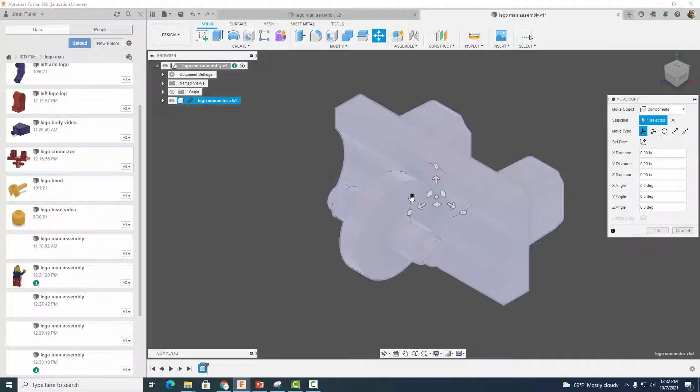The next thing I want to do is insert my Lego connector piece. I'm going to right click, insert into current design, and arrange it so it looks something like this. I'm going to select OK, then right click over here and select ground so it's held in place.

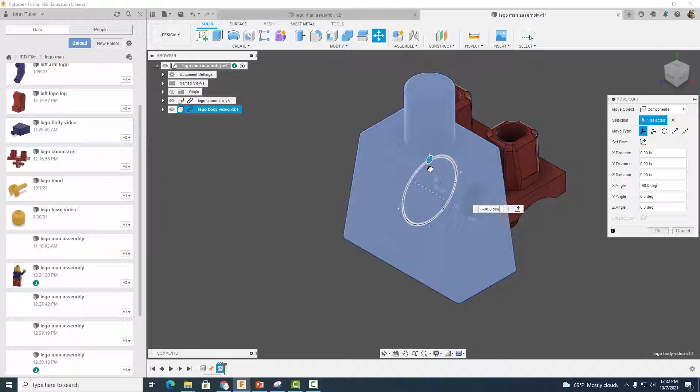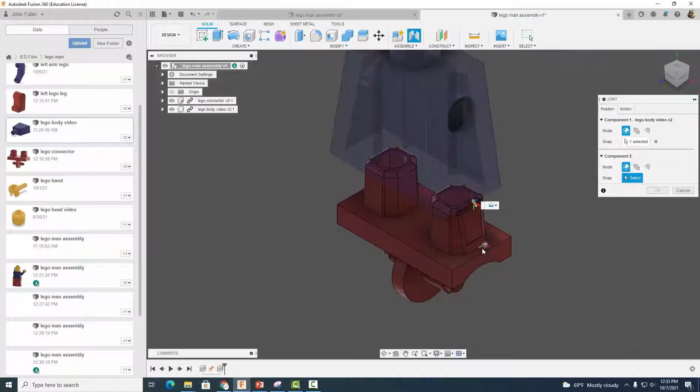The next thing I'm going to do is right click my Lego Man body, insert into current design, and move it up into place like this. Once I've got it positioned, I'll select OK, then add a rigid constraint. When I select joint, I'll choose rigid, select this midpoint, and make sure it matches up with this midpoint. That looks pretty good, so I'll select OK.

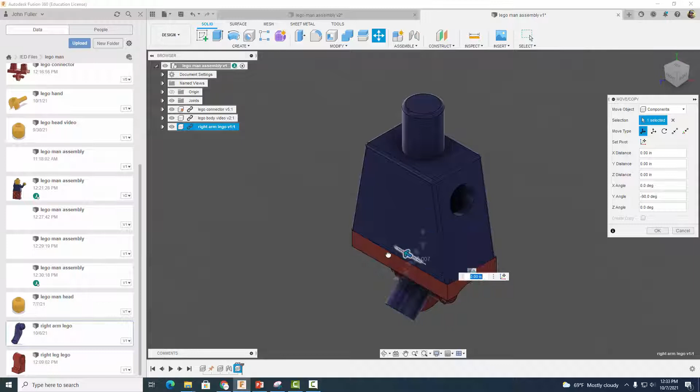All right, so we've got two parts already assembled. Now let's do the arms, starting with the right arm. Let's insert that into the current design. Once again, I'm going to rotate it around so it's in place where I want it, looking like it's ready to be assembled. Select OK.

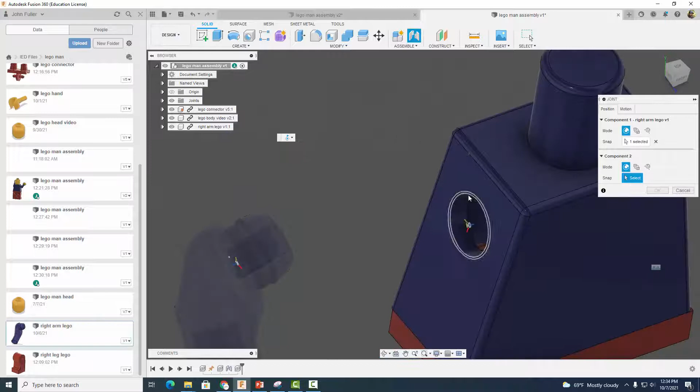Now we're going to go to assemble, select joint, and this time we're going to do a revolute joint. We want to select this surface so it matches up with that surface. That's what we want, so go ahead and select OK.

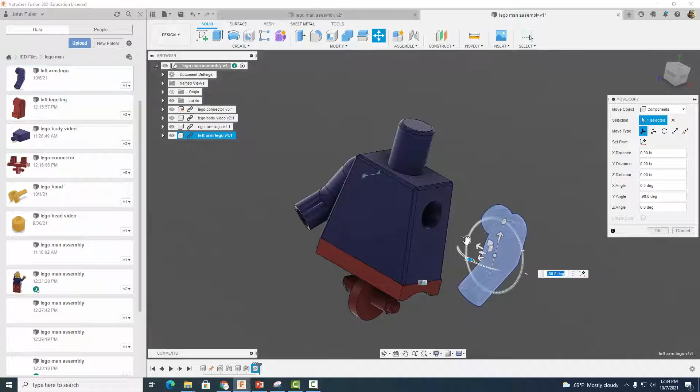Let's repeat this process now for the left arm. We're going to come on up, find the left arm, insert into current design, and get it positioned something like that. Select OK. Oop, it's a little off, but that's okay.

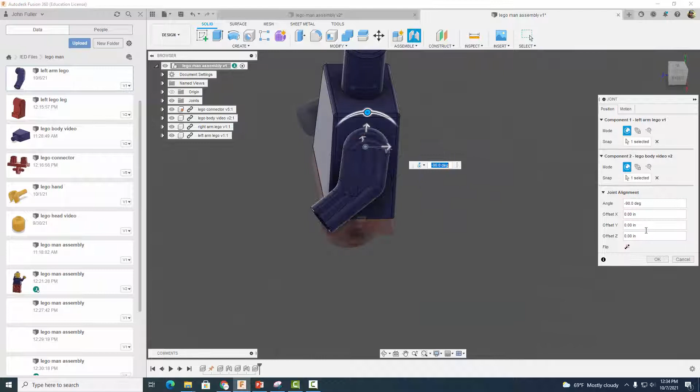Let's go to joint, and once again select revolute joint. We're going to select the same thing we did last time, right there, and right there, and we're good. Let's go ahead and select OK.

Now let's go ahead and add our head. We're going to right click, insert into current design, and move it up. Be careful, we want the bigger hole down here and the smaller hole up here. That looks pretty good, so let's select OK.

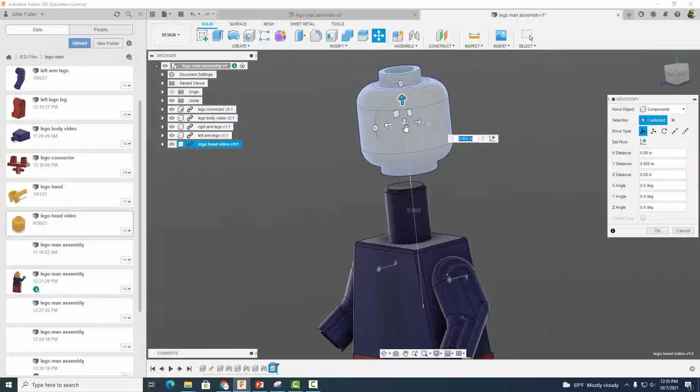Now, same thing, revolute joint, assemble joint. Make sure it says revolute. We're going to select that circle to match that circle, and there we go. Our head should be able to rotate freely, and it does.

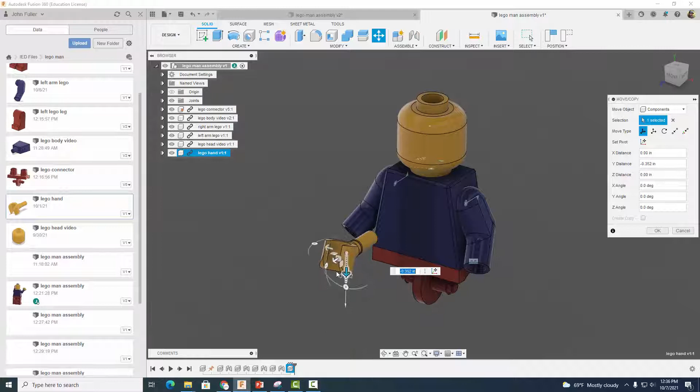Now let's go ahead and throw our hands in there, and we don't need a right or a left hand, we can use both of them. We're going to insert into current design, and rotate it around so it looks something like this. Pull it out, up, and over, maybe down a little bit. That looks pretty good, though it's always hard to tell from the way you're looking at it.

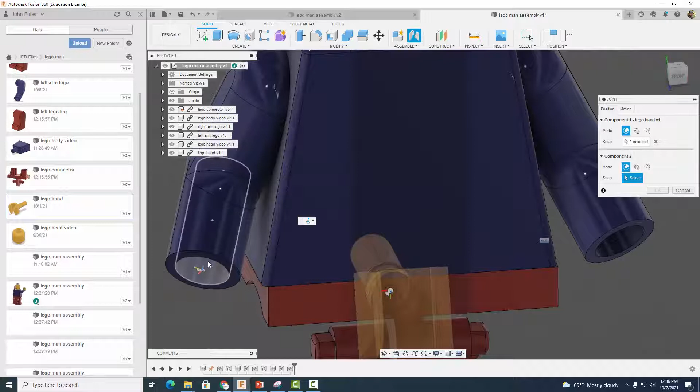But let's go ahead now and do a joint again, and we're going to pick the same joint we did last time. Right there, we want that hole or circle to match up with that one right there, and there we go.

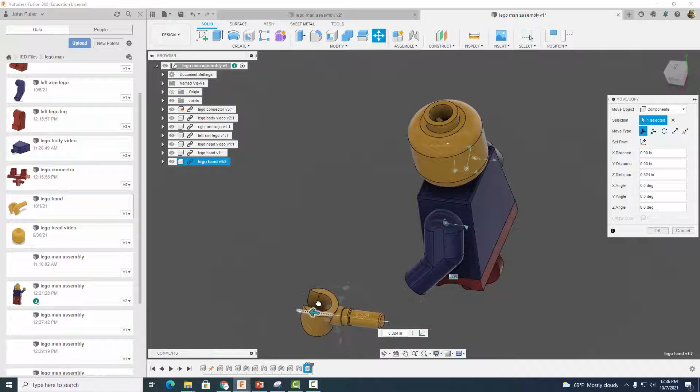Select OK. Let's repeat this process for our left arm. Insert into current design, move it over, rotate it around, something like that. Move it up, over. That's probably pretty good.

Now let's go ahead and add our joint. We're gonna select there, and select there, and select OK. All right, so we got pretty much everything but the legs now, so let's go ahead and do that.

Now you can do this two ways. If you were following along in the videos, you could probably do both legs and insert them into current design. I'm going to do the left and right leg individually, so I'm going to find my right leg, insert into current design.

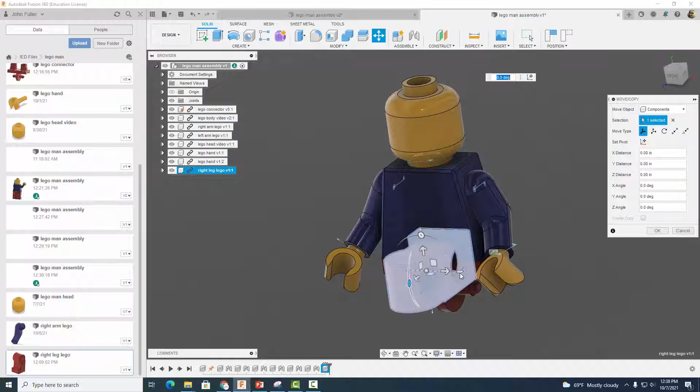I'm going to arrange this guy so it looks like it's going to fall into place. Let's see here, still not where I want it. That looks pretty good. Let's go ahead and select OK.

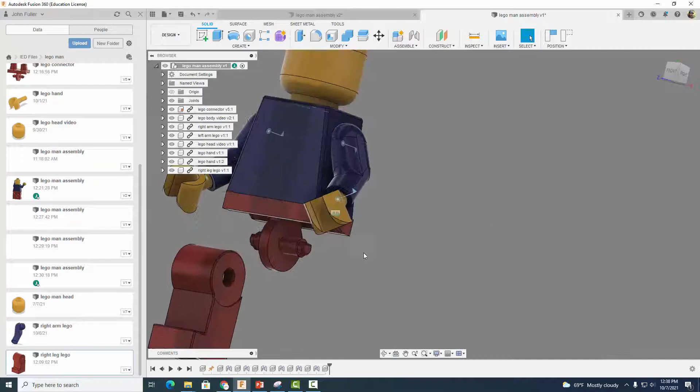All right, now same thing, revolute joint. So we're going to select right there to right there. Select OK.

Now let's repeat this process for our left leg. Right click, insert into current design, move it into position, into a favorable position. Let's see here. Okay, that's pretty good. Select OK.

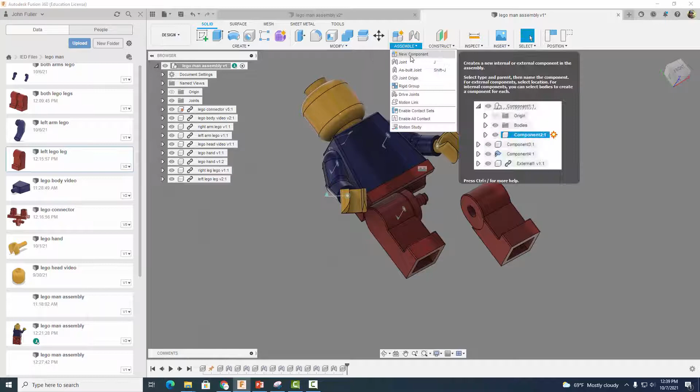Use our joint again, same joint we've been doing the whole time. Get that guy right there. Select OK. All right, and our Lego man is pretty much assembled.

Except for one thing, you may have noticed that our leg just kind of goes up in through our Lego man. So let's add some joint limits here so it doesn't do that.

So let's come on over here to our joints and Revolute 8. Let's go ahead and edit joint limits here. Okay, so we're going to click on minimum and maximum. And I'm going to zoom in here. This part's always a little tricky for me because it's hard to see.

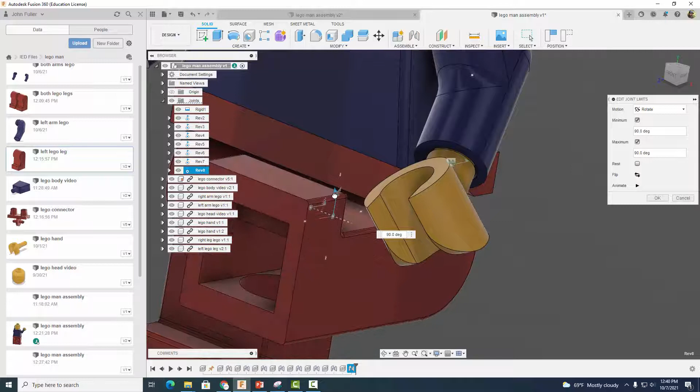So for my minimum, let's do something like 90. Okay, and then for our maximum, let's just go ahead and hit OK.

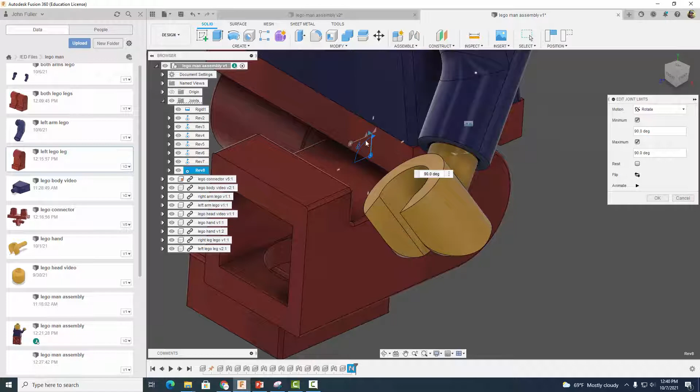Okay, so let's edit this guy again. And then for our minimum, let's stop it like at -60 or something. Okay, and select OK. Let's see what that does.

So we go up and we go back there. So that works good. Okay, let's do the same thing now for the other leg. I'm just going to take note of what I did here: edit joint limits, so we have a minimum of -60 and a maximum of 90.

All right, so let's do this for the other leg. Let's come over here to our Revolute 7 joint and edit the joint limits here. Let's just see if we can type it in like we did last time. So we had a -60.

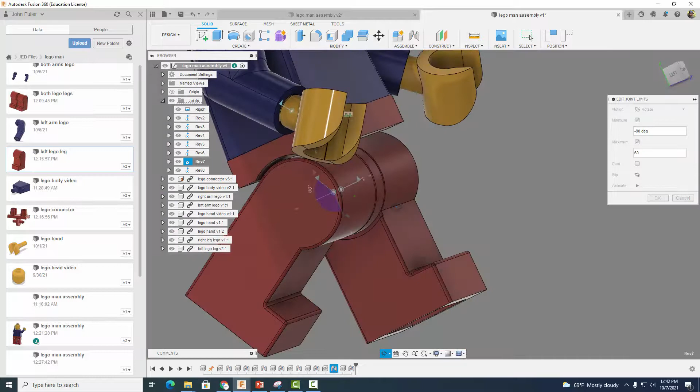Okay, and that doesn't look quite right. So maybe try -90. Yeah, there we go. And then let's come over here and do now 60. See if that worked. Okay, let's hit OK, and we're good.

Okay, so we have our joint limits in place. All right, and we don't really need them for any other joint because, I mean, the Lego man really can do this, right? He's got a lot of flexibility. He's probably double jointed and all that good stuff. And his hands can kind of go around and whatnot.

All right, so there you go. Our Lego man is done.